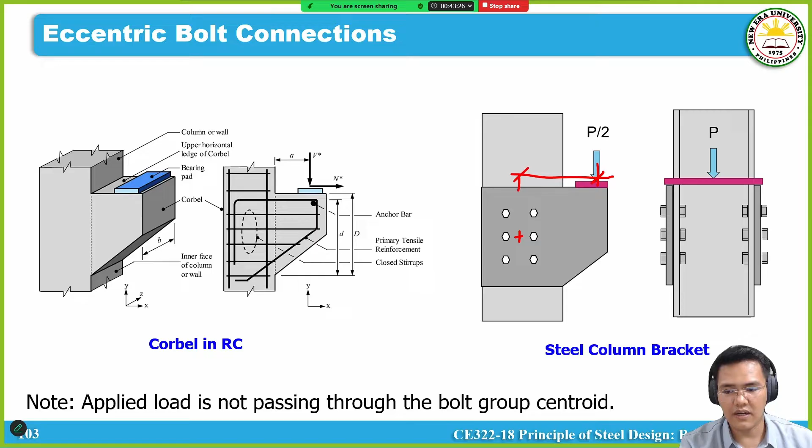And what happens is you now have an eccentricity in that direction. So let me emphasize: in this example, our applied load is not passing through the bolt group centroid, and there's an eccentricity. So what do we do?

Let's give another problem for eccentric bolt connection. So for this figure, we have a column bracket like so, and we apply a load P at a certain angle.

To simplify our calculation, we could resolve this into components. So you can see we have component P sub Y and component P sub X.

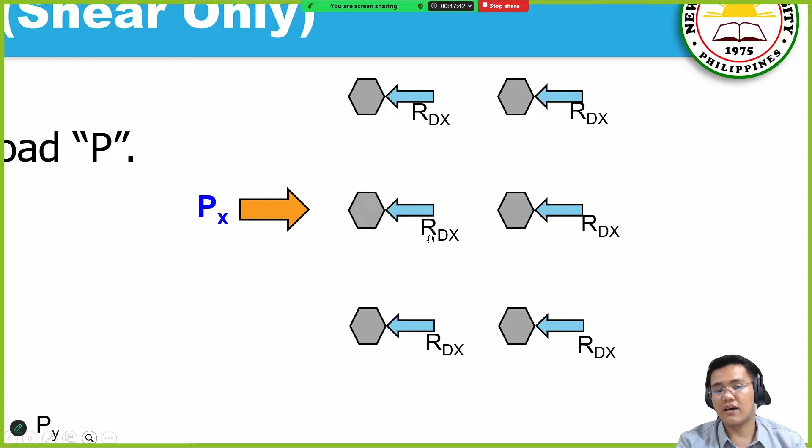Similarly, for P sub y, it's going down, so the reaction is going up, equally shared as R sub dy.

For step 3, we have a derived formula. I want to emphasize R sub tx, which is this equation, and R sub ty, the same set of equation.

The question is, how was that derived? Let's show it. But for the board exam, you should not derive this, you should already memorize it, since we have limited time, so you should be able to memorize these values.

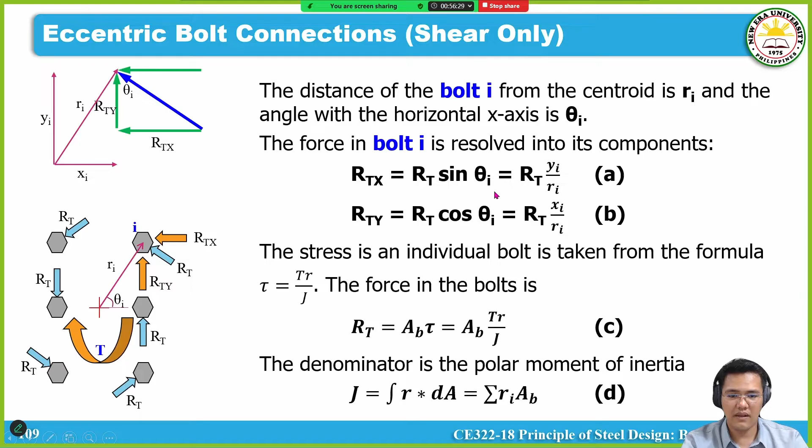Now let's use equation D to substitute in equation C. What are those two? We substitute them into the equation, and we will have R sub T equals A sub B, torque R, and J. Then we simplify it further by substitution.

On this equation, something can cancel out: A sub B cancels with A sub B here. What remains is torque R over the summation of R sub I. That's our equation E.

Now, by common sense, using the Pythagorean theorem, R squared equals X squared plus Y squared, you would have this equation for the summation of R sub I. Let's plug that in, and let's call this equation F.

Now let's substitute everything. From R sub Tx, from the previous slide, let's substitute all of it to see how we arrive there. This is R sub Tx, and this is our equation: R sub T, Y sub I over R sub I. Let's take R sub T first, which we already derived. So for R sub Tx, we still have Y sub I over R sub I. Let's go back to the next slide.

So ito na yun, okay? Simplify. Meron mga cancel out, I think R sub I. Cancel out, materialize ito. Okay, the torque T times the Y distance.

Gusto ko lang i-emphasize, no? If X component yung kinakalculate natin, Y distance, no, yung ating gagamitin over the polar moment of inertia. Okay, similarly for R sub T, Y. Okay, ito equation natin.

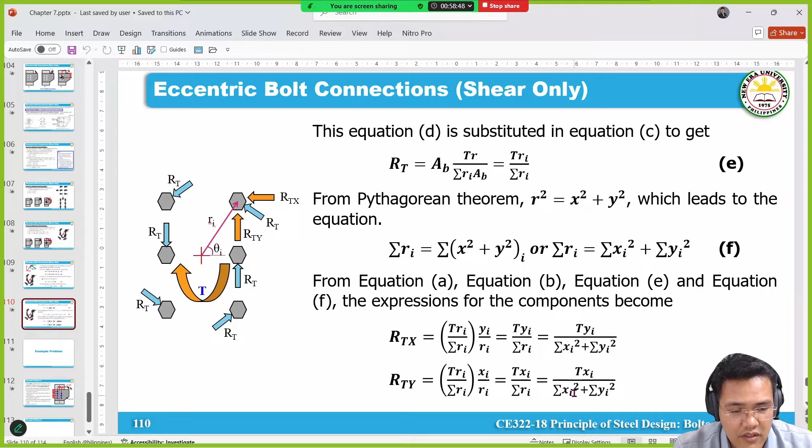Ang mapansin yung multiplier for Y component is yung X distance, X sub I, divided by the summation of X sub I plus Y sub I, or polar moment of inertia. Okay, sige, para mas maganda, mas ma-visualize niyo, let's do the calculations na lang.

Okay, so example problem tayo. Sample problem, number 5.

Using LRFD, determine the adequacy of the connection shown based on the bolt shear capacity. The bolts are 22 mm, A490N. A, locate the bolt group centroid from bolt 1. B, calculate the component reaction due to the direct load P. C, determine the polar moment of inertia of the bolt group. D, determine the component reaction due to the applied torque T.

E, find the reaction of the most stressed bolt. F, what is the design shear strength of one bolt? G, what is the DCR?

Okay, so for example problem number 5, which is eccentric bolted connection, shear only, we could see na ito yung arrangement ng ating mga bolts. Now, masyado kasing madali kung ang arrangement is 4 by 2, so to complicate our calculation, tinanggalan ko ng isang bolt dito. Okay, so hindi rin ganun, hindi rin same yung ating spacing: 80, 100, 75.

Tapos meron tayong 60 doon from point of application ng ating load PU. Tapos ang distance ng ating column of our bolts, no, is 180. Tapos from this column of bolts, meron tayong 200 from the point of application ng load PU. Yung load PU natin is 350 kilonewton inclined at a certain slope, which is a 3-4-5 triangle kumbaga.

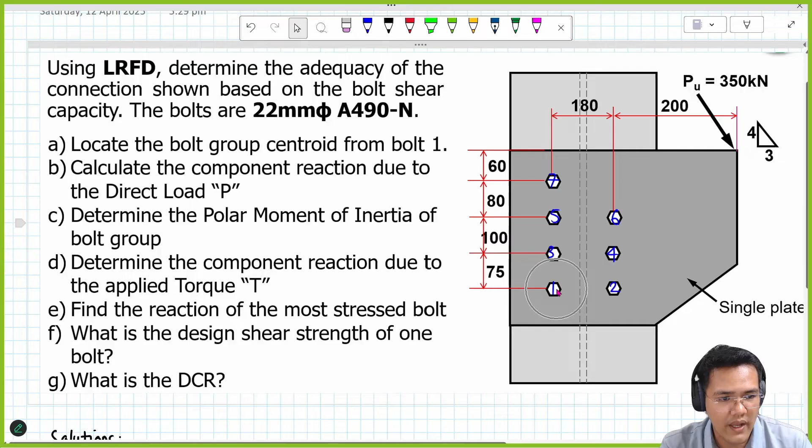Okay, sige so item A, automatic 'yun, no? Yung ating bolt group centroid, lagi 'yun, yung ating bolt centroid of our bolt group. Now dito specific na sinasabi niya, kunin mo daw yung centroid mo from bolt 1. Okay, so ito yung naming natin ng ating bolt 1, 2, 3, 4, 5, 6 and 7. Centroid from bolt 1.

So in terms of centroid, I think alam niyo na, in terms of centroid. Siguro mas maganda, let's simplify pa further yung ating figure to eliminate some, simplify. So let's use itong figure na to, galing sa past calculations. So meron tayong 7 bolts.

And these bolts meron tayong spacing as depicted dito sa figure, okay, so okay na tong spacing na yan. So ang sabi, to calculate the bolt group centroid from bolt 1, ang first step kasi in terms of centroid determination, dapat mag-assume ka ng origin, di ba? So ito yung i-assume natin na 0,0.

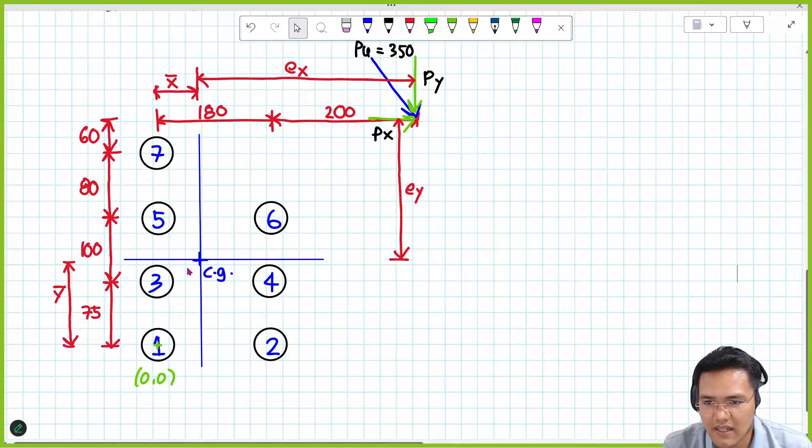Okay, so by common sense, ito common sense lang to. Since nawala yung isang bolt dito and mas marami yung bolt dito sa ating left side, dapat medyo didikit dito yung ating centroid sa 4 na bolt. And dito naman sa to, since 4 yung bolt dito and 3 na lang dun sa taas, dapat medyo didikit din sa bolt group na to yung ating centroid. So check natin yun mamaya.

Okay, so in terms of centroid calculation, mabilis lang naman yon. Ang gagamitin natin, as discussed kanina, would be the Varignon's theorem. Varignon's theorem pa din. Okay, which is, ano nga ulit to?

Ang sabi natin dito, the centroid. X bar - yung definition ng X bar is from the origin to the centroid, CG, that is your X bar. Again, from origin to CG, yung vertical distance naman, that is your centroid Y bar.

For X bar, ang sabi natin is the summation of area, individual area, times the distance X, or the centroid of that individual area, divided by area total. Basically, yan lang yung definition ng ating X bar.

Dito kasi, as you can see, wala naman tayong area, pero we could take advantage yung number of bolts. Kumbaga, isang bolt is equivalent to isang area or equal to 1, for simplification. We would replace yung area by the number of bolts for our calculation.

Hindi mo lang pwedeng gamitin yon kapag magkakaiba yung diameter ng ating bolts. So yung assumption na yon is assuming na lahat ng bolt diameter natin is pare-parehas dito sa ating connection. Pag meron kasing differences in terms of bolt diameter, mas complicated yung calculations, hindi mo na pwedeng gamitin to. Sa board exam wala namang ganun, even on my problems.

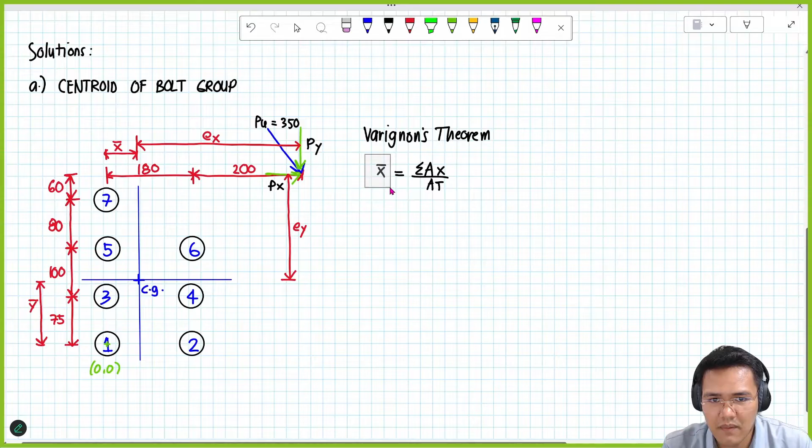So let's use this formula for centroid. Sige, plug in natin yung mga values. For example, from the assumed origin, punta muna tayo sa column of bolts na to. Itong column muna - we have all in all 4 bolts for this column.

For the area, yung sabi natin number of bolts, multiplied by the x distance. Now, from origin, to the centroid of each individual bolt na to, ano ba yung x distance niya from the origin? Common sense yun, that is 0, kasi nga wala namang difference in terms of x distance yung mga bolt na yan.

Plus, summation, itong column of bolts naman na to, yung 2, 4, and 6, so tatlo yan, meaning 3. And then yung distance niya from the assumed origin, so that is 180. Now let's proceed dun sa denominator, so which is the area total, that is synonymous with the total number of bolts.

So sa bolt natin, connection natin, we have 7 bolts. So we would have the value of x bar which is equal to ilan to? 77.14286, 77.14.

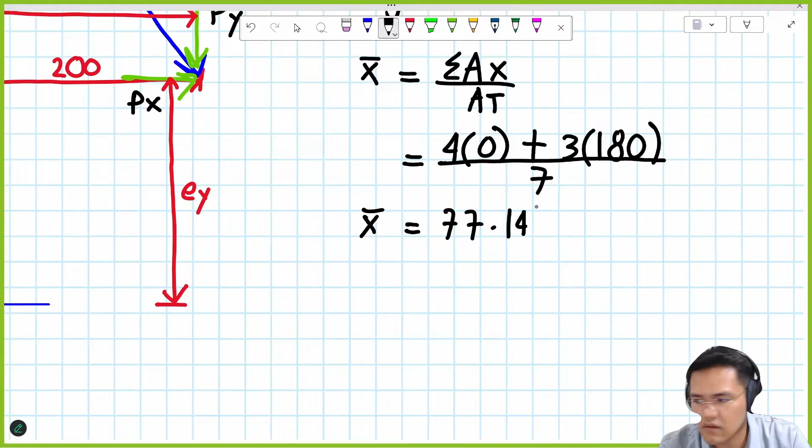Okay, sige, okay na tayo sa x bar. We could now calculate yung y bar. So yung y bar naman, ganun din, Varignon's theorem lang din. So dito, summation of area, yung centroid of that individual area divided by area total. So parang wala na masyadong nagbago.

So plug in natin yung mga values. From the assumed origin, yan yung strategy natin on centroid calculation. Unahin natin yung bolt 1 and 2. Row naman tayo ngayon, row. So for bolt row 1 and 2, ang total number of bolts nun, dalawa. So 2 times ano ba yung y distance nung bolt 1 and 2 from the origin or from the bolt 1. So that is 0.

Plus, yung bolt row 3 and 4, so dalawang bolt yon, so 2 times ano ba yung distance niya. So yung distance niya from the origin is 75.

Similarly, for bolt 5 and 6, ganun din, that's 2 bolts times yung distance niya from 0, that is 75 plus 100. And lastly, yung bolt 7, which is 1 bolt only, and ang distance niya is 75 plus 100 plus 80.

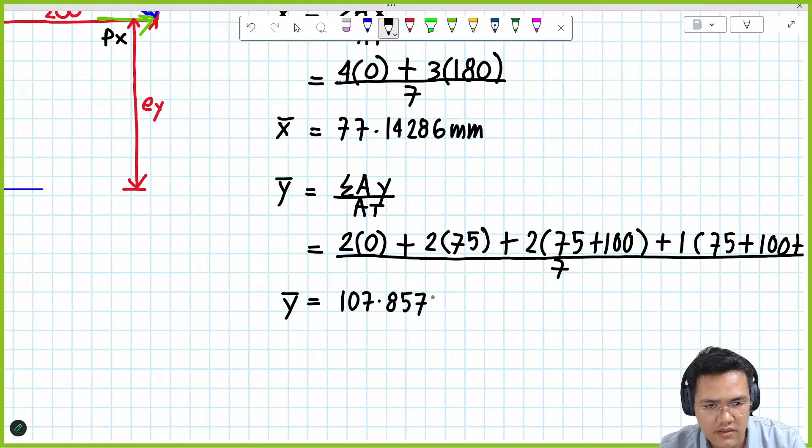So we would have y bar equal to how much? 107.85, 107.85, 714. Okay, so we're done in terms of the centroid.

Let's quickly check if this makes sense. The x bar we calculated, common sense-wise, you could see that half of 180, this distance, is 90. And there's 4 here and 3 in terms of the column, so it should be closer to this column. So 77 makes sense. Similarly for y bar, I think this is also the appropriate value. Now we could proceed to the rest of the item.

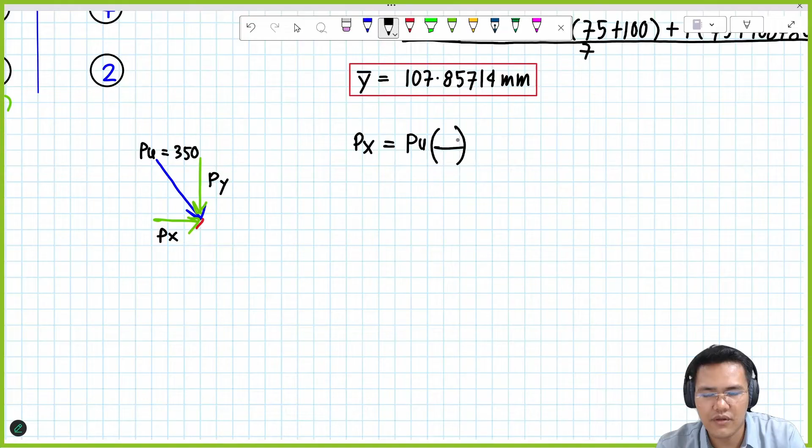Let's just use similar triangles. This would be P sub U multiplied by a certain ratio. By the way, the slope of our applied load is a 3-4-5 triangle. So obviously PU is the hypotenuse, the denominator 5, and since we want P sub X, the numerator should be 3.

By similar triangle, we could also calculate P sub Y using P sub U times, in this scenario, since P sub Y is in this direction, that would be 4. As simple as that.

We could plug in the value of P sub U into our equation. So what values do we get? P sub U is 350. P sub X is 200... 210, okay. How about P sub Y? 280. 280 kilonewtons, okay.

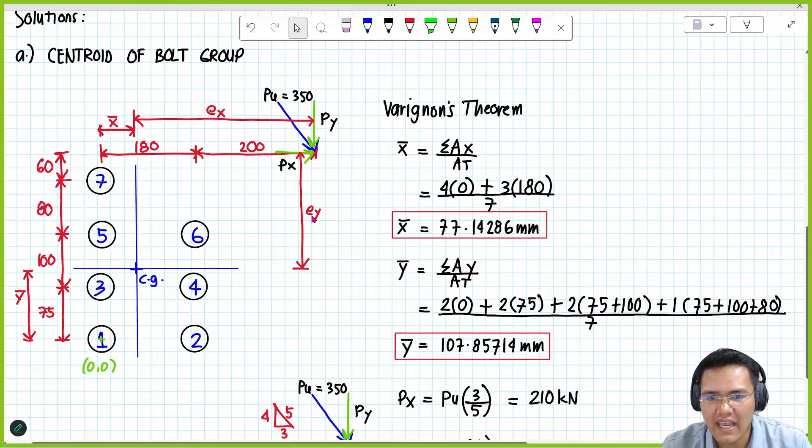Alright, we're done with this resolved component. Let's calculate the remaining parameters we'll use, for example the eccentricity X and eccentricity Y. So what's the definition of these two? Well, from the centroid to the point of application of load PY and PX, there's a moment arm.

The moment arm from centroid to the point of application, this horizontal eccentricity, we'll call E sub X. If we want to calculate E sub X, we have this distance, 180 plus 200, that's the total, and then we subtract x bar to get E sub X.

Let me show it here: E sub X is simply 180 plus 200 minus x bar. So we have the value of E sub x, or eccentricity x. Let's plug in x bar into the equation. How much is this?

322 point... please double check what you're giving me. 322.8571... 332... 322, please. So, okay, how about the other student? 322.85714.

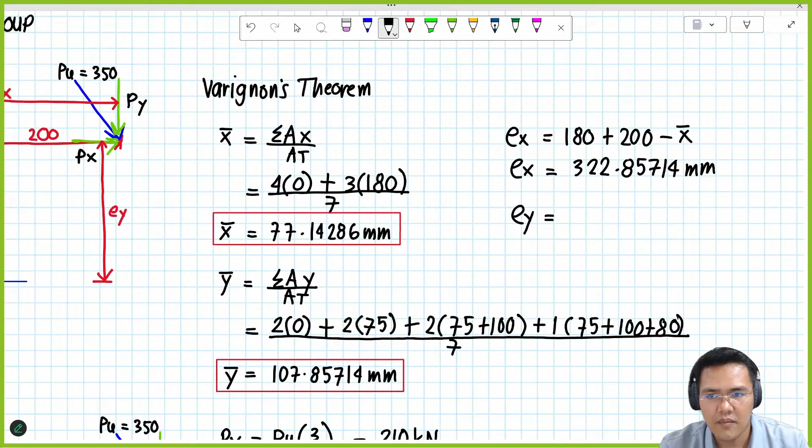Okay, I'm assuming it's the same from the other student. Now E sub Y. For E sub Y, from the CG to the point of load application, this is the vertical eccentricity. How do we get it? If you refer to the figure, E sub Y is simply 60 plus 80 plus 100 plus 75, then we subtract Y bar, and what's left is E sub Y.

So again: 60 plus 80 plus 100, plus 75, minus Y bar, okay. Please double-check this E sub X again, because I think this isn't the right number.

From 302. Sir, 302. Yes, but the rest is the same. Correct? Yes. Okay, how about this one?

This is E sub Y: 207.14286. Okay, alright.

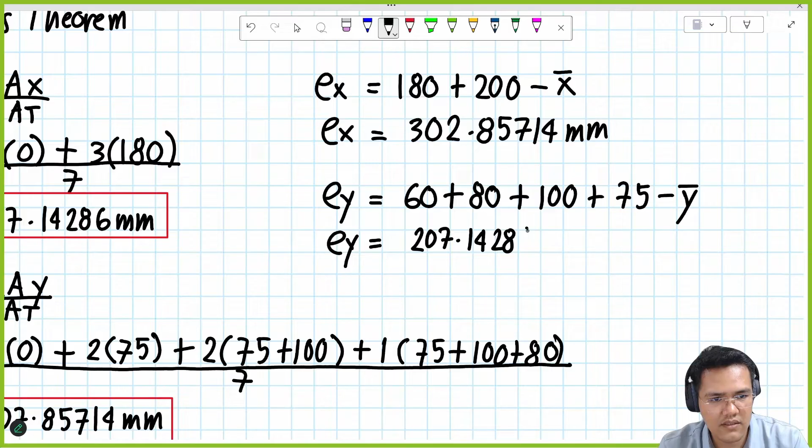So okay, we're complete in terms of the parameters we need. We could now proceed to the next item: calculate the component reaction, or the reaction due to the direct load P, for item B.

For the direct load P, ang sabi natin kanina, 'di ba? Copy natin tong figure natin na to. Let's use this to simplify our calculations, no.

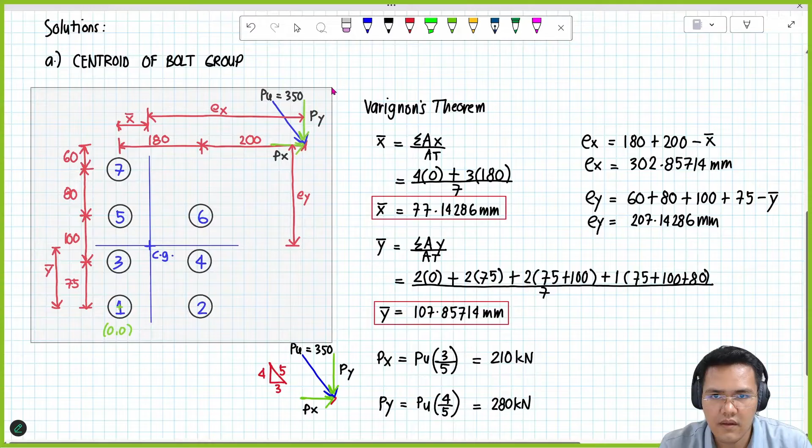Ang sabi natin kanina, for direct load P, ang gagawin lang natin diyan, ililipat natin yung ating mga forces, yung resolved component nun, dun sa centroid ng ating bolt group, okay? So halimbawa, yung P sub y natin is downward, yung P sub x natin is going to the right, okay? Ibig sabihin, if nililipat natin siya dito, we could say na ito yung P sub y. Then ito naman yung P sub x. Yun na yung direct load P.

Ang discussion natin dito for the direct load P, basically ano lang 'yan, no? Ang sabi natin dito parang third rule ni Newton. Sabi natin for every action merong equal but opposite reaction. So ibig sabihin for P sub x na lang going to the right tayo.

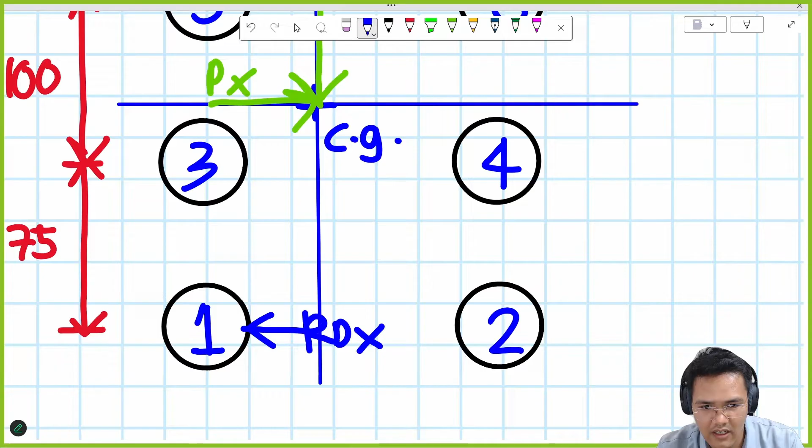Kung i-check natin yung bolt number 1, yung bolt number 1 should have an opposite direction ng mga reaction na yon. So going to the left tayo, going to the right tayo. Ibig sabihin going to the left yung ating R sub dx, na component. Similar with P sub y which is going down.

Ibig sabihin going up yung ating reaction sa ating bolt, and this is due to direct load. Kaya gumagamit tayo ng subscript na d, R sub dy.

Meaning y component. Now, obviously, for direct load P, hindi mo na kailangang i-calculate lahat kasi pare-parehas lang naman yan sa lahat ng bolt, kasi nagpa-pass through na sa bolt group centroid. So ayun na, i-copy mo na lang siya, kasi pare-parehas naman na lahat yan. Sa lahat ng bolt, dun sa connection natin, yung due to direct load is no?

Parang we need to... okay, ilipat ko lang to guys, para mas mabasa ng maayos.

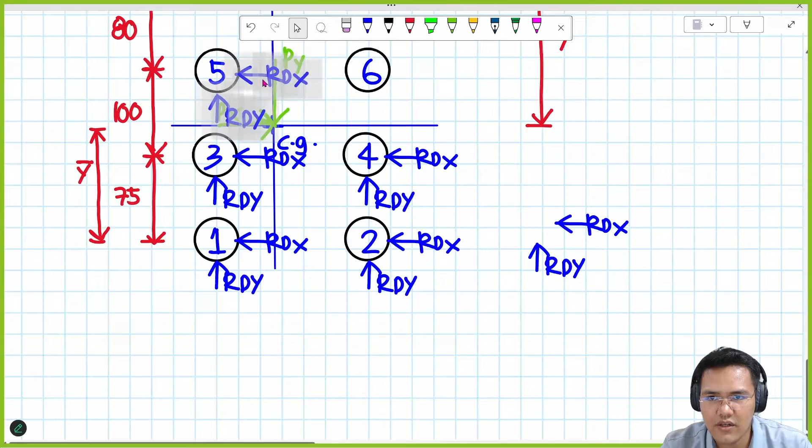Okay, similar na lang siya on for the rest of the bolts. Okay, and yung formula natin dito, as per discussion kanina on the derivation of formulas, na supposedly memorized yun. Pag nasa board exam kayo, hindi na kayo mag-derive pa ng formula.

Ang formula natin for the R sub dx muna, for R sub dx na component, ang sabi natin diyan that is simply yung load P sub x divided by the total number of bolt. Equally shared lang sila.

So therefore, we could say na yung P sub x natin as per calculation sa taas, that is 210. P sub y is 280. So plug in lang natin dito, we would have P sub x is 210, divided by the total number of bolts. So we would have R sub dx. Ilan to? 30, 30 kilonewton. Simple as that. So 30 kilonewton.

And yung R sub dy is as simple as yung load P sub y divided by n. So that is 280 divided by 7. So R sub dy now is equal to ilan to? 40, 40 kilonewton. So meron na tayong reaction due to direct load P, which is yung pinakamadali.

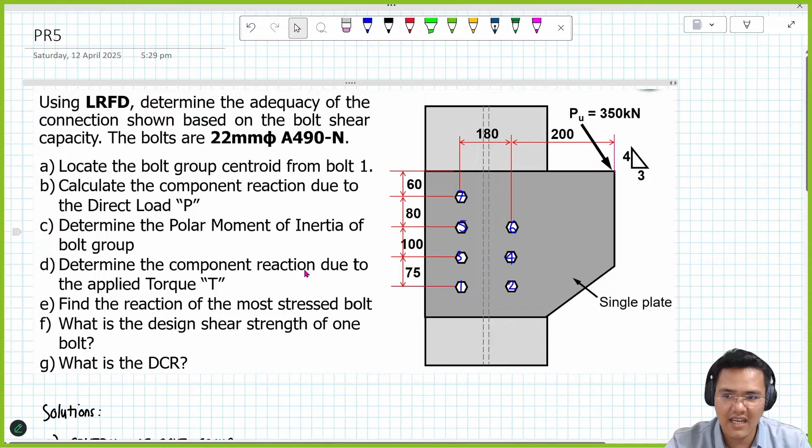Punta tayo sa next item. Sa next item is to determine the polar moment of inertia of the bolt group. So actually, preparation lang tong item C for item D, which is to calculate yung reaction due to applied torque. Kasi gagamitin natin itong parameter na to, yung polar moment of inertia. So sige, calculate natin yung polar moment of inertia ng bolt group.

Ang question is, paano ba siya kinakalculate? Well, pinakita na natin kanina, polar moment of inertia, kung paano siya i-derive, and may formula na nga tayo. So gagamitin na lang natin yon. Sige, let me copy natin to.

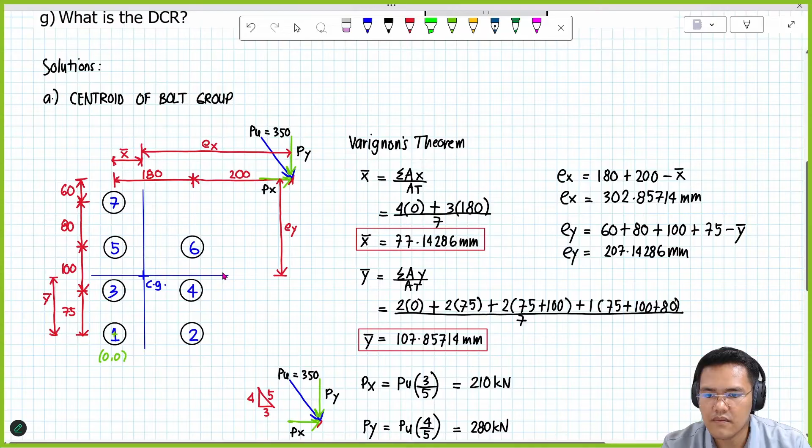Dun sa derivation natin, i-reply ko lang yung PowerPoint kanina. Dun sa derivation natin, ang sabi natin, dun sa mga formulas na na-derive natin, yung J, which is the polar moment of inertia, is also synonymous with this one, no? Yung summation of x squared plus summation of y squared. Actually, yun na yun, yun na yung formula natin. So we could say na yung J, or the polar moment of inertia, is equal to summation of x squared plus y squared.

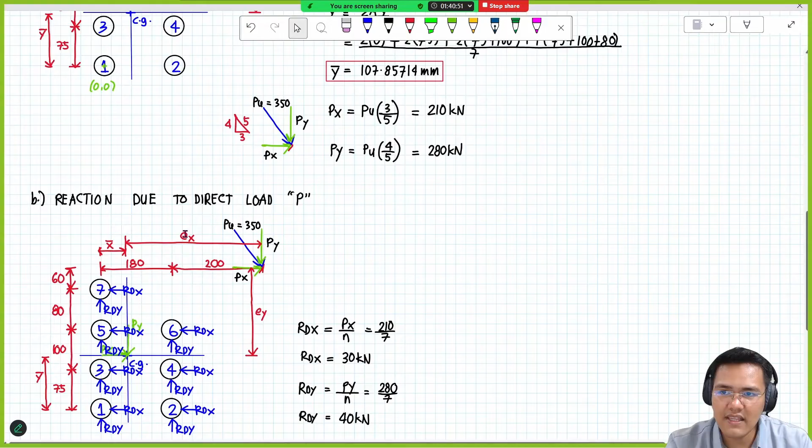So ngayon ang question is, ano ba ibig sabihin ng mga distances na yan? Well, just to emphasize, yung mga distances na to, kung sa centroid, ang measurement natin is from the assumed origin. Pagdating dito sa polar moment of inertia, ang measurement natin from CG na.

Okay, from CG na. So halimbawa, mag-focus muna tayo kay x distance. By the way, kung ito yung CG mo, kahit na mag-assume ka dyan ng negative or positive, irregardless kung ano yung value, mapapansin mo naka-squared to, meaning absolute value, kahit absolute value na lang.

Kasi positive pa rin naman yung lalabas. Okay, sige, unahin muna natin yung x squared. Sa x squared, from CG, itong column ng bolts na to ay pare-parehas yung distance niya from CG, which is the distance x bar. Yun lang pala yun, yun lang distance na yun. So therefore, yung ating x squared is simply yung x bar, yung distance ng apat na bolt na to, yung 1, 3, 5, 7, and yung ating x bar is ito. Copy natin to.

At ang sabi is squared daw natin. Squared. At don't forget to include kung ilang bolts ba 'yon. Ilang bolts ba 'yon? We have 4 bolts. So times 4.

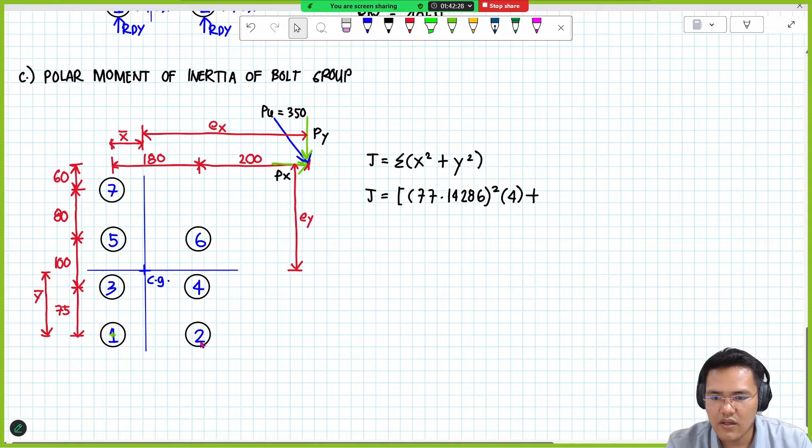Plus, yung bolt naman sa right side. So from CG, ano ba yung distance ng bolt 2, 4, and 6? Actually, wala pa tayo nakaka-calculate, pero we could take advantage nung 180 minus x bar, kasi yun din yung distance na 'yon, distance ng CG to our bolt 2, 4, 6. So plug in natin dito, that is 180 minus x bar, at yung x bar natin is ito.

Then multiply natin by the total number of bolts, so tatlo yon, times 3. Okay na tayo ngayon dun sa x squared, na-count na natin lahat ng bolts, distance ng mga bolts at x direction, from CG.

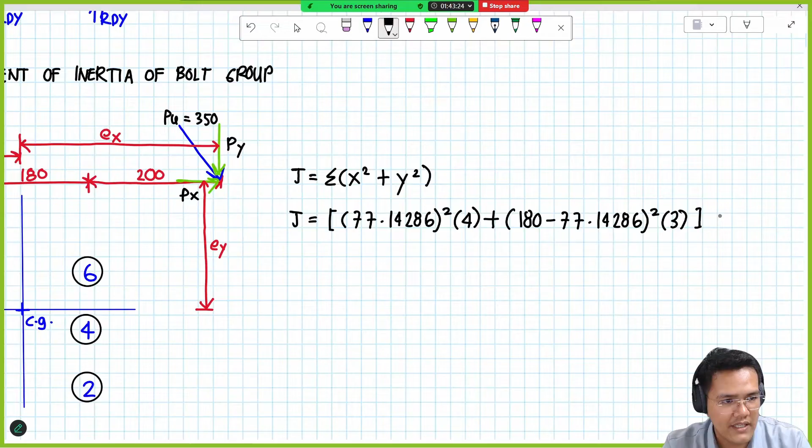Punta tayo ngayon sa y squared. For y squared, ito ngayon yung calculations natin. Unahin muna natin yung bolt 1 and 2. Yung distance niya from CG is simply y bar, as simple as that. So kunin natin ngayon yung value ng y bar, ito yun.

Bolt 1 and 2, ito yung y bar, yung y distance natin doon. Don't forget to multiply by 2 kasi dalawang bolts yun.

Sunod tayo sa bolt 3 and 4. Para sa bolt 3 and 4, y distance, from CG, ano ba yung y distance natin? Dalawang bolts na yan, so that is simply y bar minus 75, kasi 75 to. So yung matitira, yung distance na yan, from CG to bolt 3 and 4, kunin natin yon, yung y distance, ito yun.

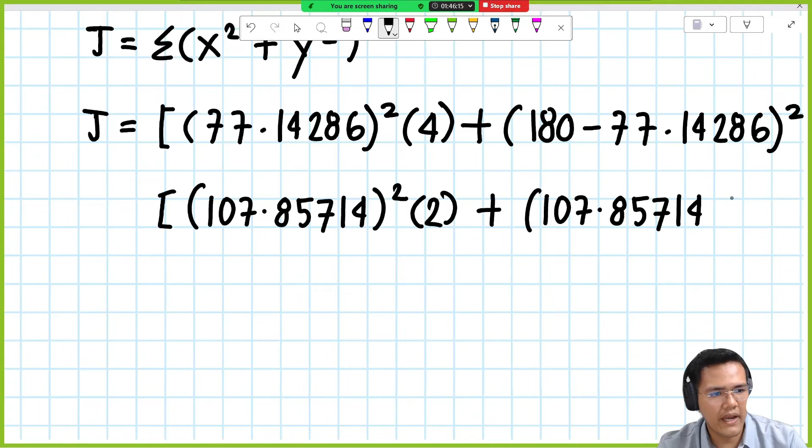Minus 75, squared, and multiply it by the total number of bolts. Okay na tayo for bolt 3 and 4.

Let's proceed sa 5 and 6. Paano ba yung distance natin from CG? Well, basically, we could take advantage, 100 plus 75, minus y bar. So ang matitira doon is from this point to this point. 100 plus 75, minus y bar, ito yung y bar natin. Times 2 rin yun, so copy na lang natin to, times 2 for 5 and 6.

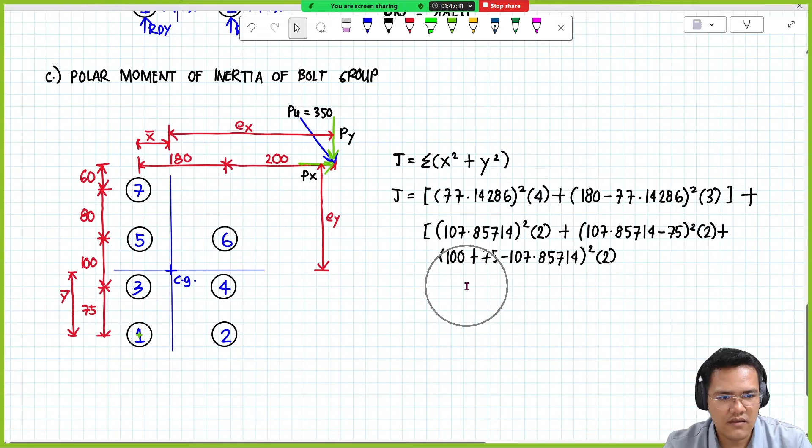Para sa bolt 7, ganun pa din, 80 plus 100 plus 75 minus y bar, yung distance niya from CG. Basically, parang ito na rin yun, so i-copy na lang natin to, dagdag na lang natin, plus 80. Ang multiplier natin dito is 1 na lang, kasi single bolt na lang tayo for bolt 7.

Sige, so that would be the complete calculation for J. So ilan to? Paki-calculate nga.

Polar moment of inertia J is equal to 56,090 point... paki-double check kasi magkaiba kayo ng value.

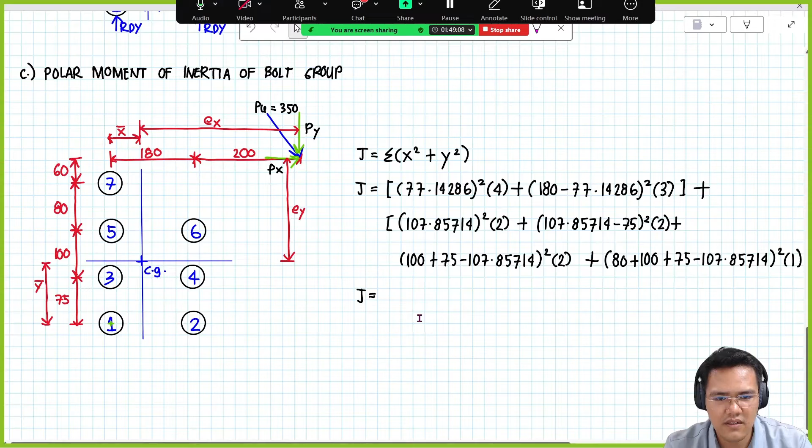Ang naalala ko, this is 111 something thousand. Paki-ano nga, sorry. So ilan to? 111,635.7143. Okay, so yung unit natin dito, as per given, is x squared plus y squared, meaning millimeter squared lang. Sige, let's proceed dun sa next item.

Determine the component reaction due to applied torque T.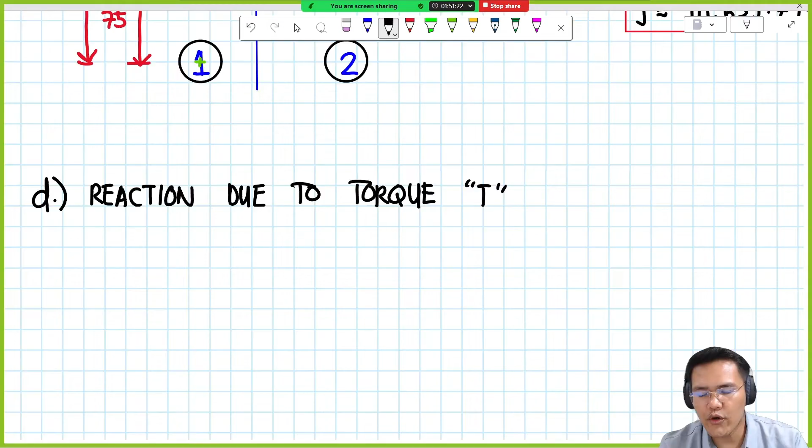Okay, for torque T, yung first step natin lagi is to define ano ba yung direction ng ating torque T. Equivalent torque T na i-apply natin sa bolt group centroid, di ba? Ang sabi natin kanina, aside from the direct load, meron pa kasing reaction due to torque. So yung first step, i-define mo muna ano ba yung direction ng equivalent torque dito, counterclockwise ba, or clockwise?

So to do that, we could simplify by taking summation moment at CG. So by taking summation moment at CG, ano ba yung mga loadings natin? Ito lang 'yon.

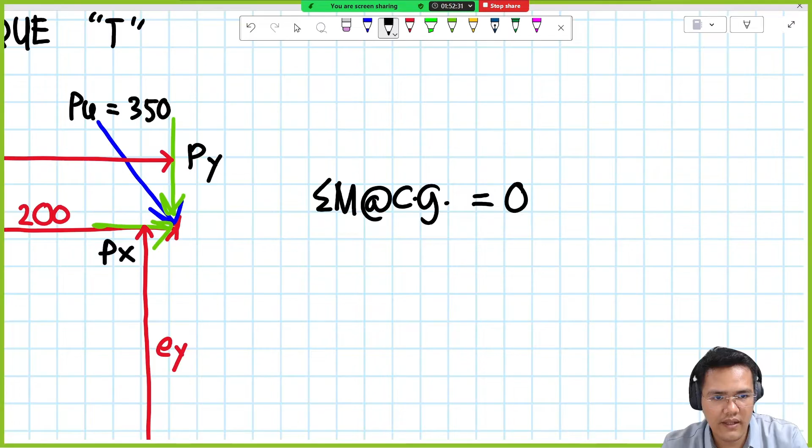P sub X and P sub Y. So, take moment at CG or centroid. Summation of moment at CG equals 0, and our assumption is clockwise is positive. So we have torque T at centroid equals, where all forces that are clockwise is positive.

For example, let's take P sub X first. P sub X from CG will have a moment or torque. So our P sub X force has a moment arm, which is simply the vertical eccentricity E sub Y. That is the moment arm of P sub X from CG.

Now, the value is positive because the rotation of P sub X is clockwise, from summation of moment at CG, so it's positive. Similarly, P sub Y's rotation is also clockwise, so that means it's positive too. So plus P sub Y times its moment arm, which is E sub X.

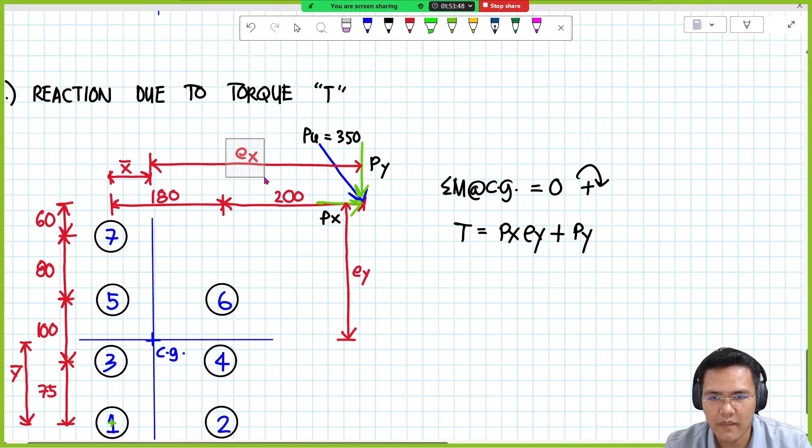Now from this, we can plug in the values. So our value would be P sub X, which we have already calculated. Where is it? We have 210, 280 for P sub Y, and these are the eccentricity values. Let's copy this and plug it in here.

So for P sub X, that is 210, E sub Y is this, and P sub Y is 280, multiplied by E sub X. So there it is, now we have the value of our torque T.

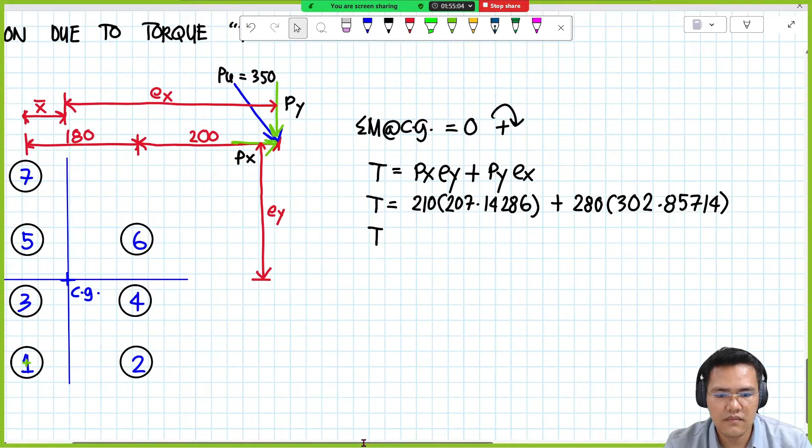So we have the torque T. So how much is it? 1, 2, 8, 299. 299 point... point 9998. Okay, so.

So our unit is kilonewton millimeter, just to be clear, so that when we do the unit check later, we would achieve the unit we want.

Okay, so we already have the torque T. And it's clear here, since the answer is positive, the direction of our torque is clockwise. Now, this is just a technique.

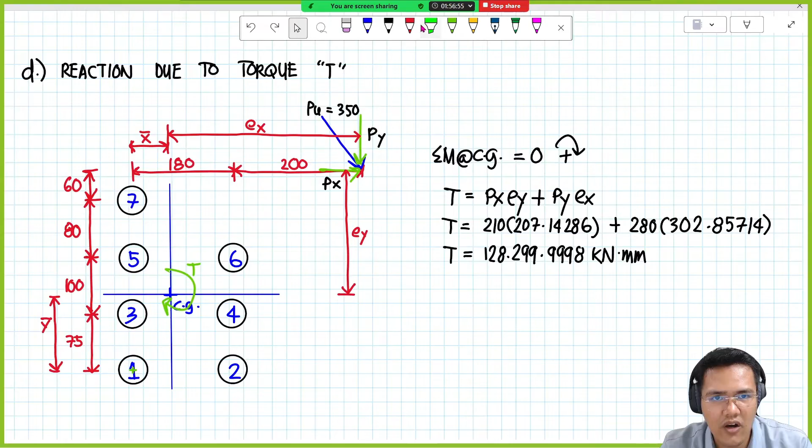Now, we already proved that our action is clockwise. So therefore, the reaction should be equal and opposite, meaning the rotation should be counterclockwise. Now, the strategy if you're drawing the reaction due to torque T is to first draw a straight line from CG to the individual center line of each bolt.

For example, this is for bolt 1. This will take time, but this is just for demonstration purposes. In an actual problem, once you know the basis, you don't need to do this anymore.

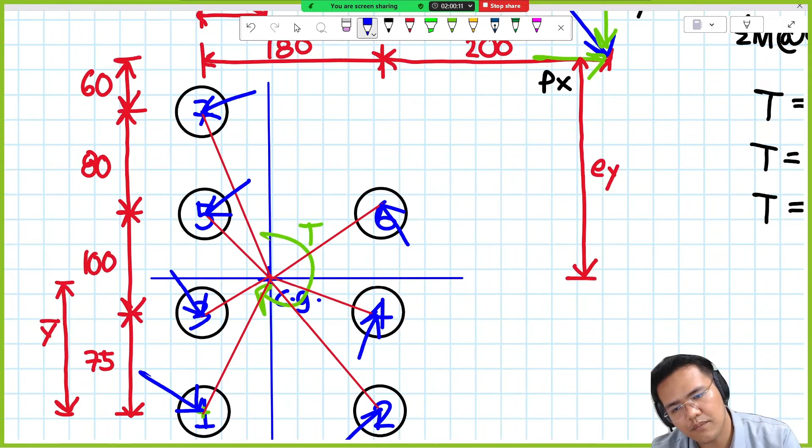So that's your assumption for the direction of reaction T, or R sub T, reaction due to torque. Now the next step is to resolve this into components so you can visualize it better. For example, this one has a component like this - the reaction at bolt 2 would be upward to the right.

Okay, so complete na yung ating mga reaction due to torque at different bolts. Now, let's proceed dun sa generic na formula ng mga na-derive natin kanina, based on our derivation.

Sa pinaka-summary, ang sabi natin, pagdating sa reaction due to torque T, the formula is simple: R sub Tx is equal to the torque T times yung y distance. Let me emphasize, kapag x component ng torque, ang multiplier natin sa numerator is yung y distance, tapos yung polar moment of inertia. Yung r sub Ty naman, since y component, yung multiplier natin is x distance.

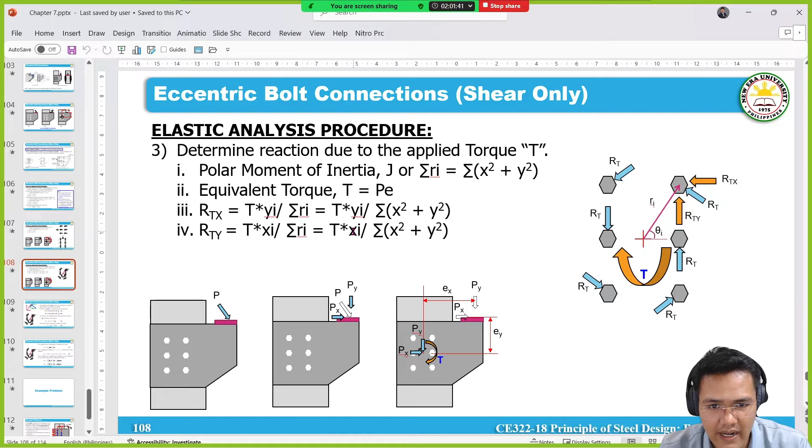Okay, so copy natin yung ating pinaka-general formula for reaction due to torque. Let me repeat, hindi ka na magdi-derive, dapat memorize mo na to. R sub Tx is equal to the torque T, times, since x component yung y distance, divided by the polar moment of inertia: x squared plus y squared.

Similarly, yung para sa y component ng reaction, parehas na parehas lang, we just need to change. So this would be r sub Ty, multiplier natin, this would be the x distance nung bolt in consideration.

So isa-isahin natin, the question is para hindi tayo tumagal, let's proceed on the calculation ng mga bolts na alam nating magogovern. Sa ganito kasing problem, ang interesado lang tayo sa tinatawag na most stressed bolt, yung bolt na kung saan pinakamalaki yung reaction na binubuhat. Siguro mag-guess kayo, yung iba sa inyo ang guess is yung bolt 7, yung iba is yung bolt 6, yung iba yung bolt 2 or bolt 1. So for the sake of demonstration, let's check yung apat na bolt na yon.

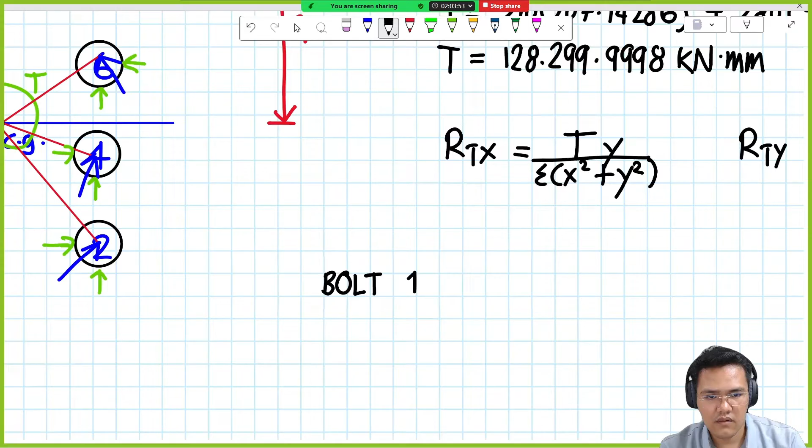Sige, let's start with bolt 1. Ang gagawin mo lang, copy mo yung mga ito. So ibig sabihin for bolt 1, we have the R sub T, and let's be clear na this is for bolt 1, R sub T1. Yung R sub T1 na yan, mayroon niya mga component.

This is R sub T1Y, and this is R sub T1X, yung x component niya. And then we could now plug in yung equation na to.

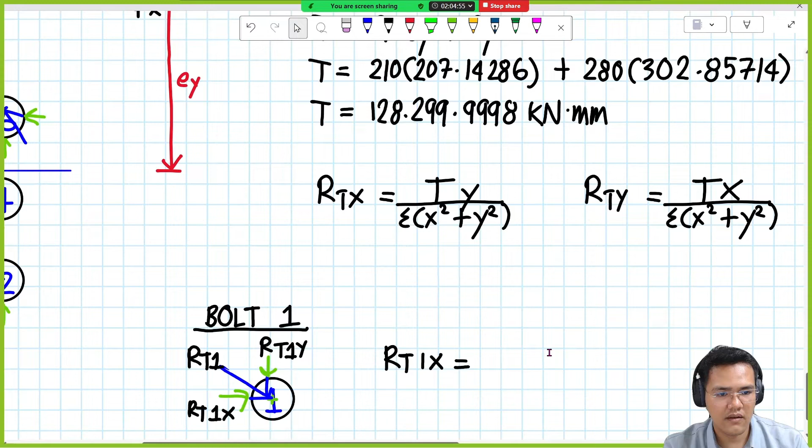So for example, yung R sub T1X is as simple as yung torque T, which is ito, nakalculate na natin. Times yung y distance, so skip muna natin yan, mag-proceed mo sa denominator, yung polar moment of inertia, nakalculate na rin natin kanina, which is ito yon, yung J. So, plug in natin sa denominator. And then we have yung y distance.

Ng bolt 1, from CG. Balikan lang natin ulit, ito yung bolt 1. Ano ba yung distance niya from CG? Well, basically, that's y bar, as simple as that. So kunin natin yung y bar, y bar is this one. So we would have multiplied by y bar, divided by the polar moment of inertia, J.

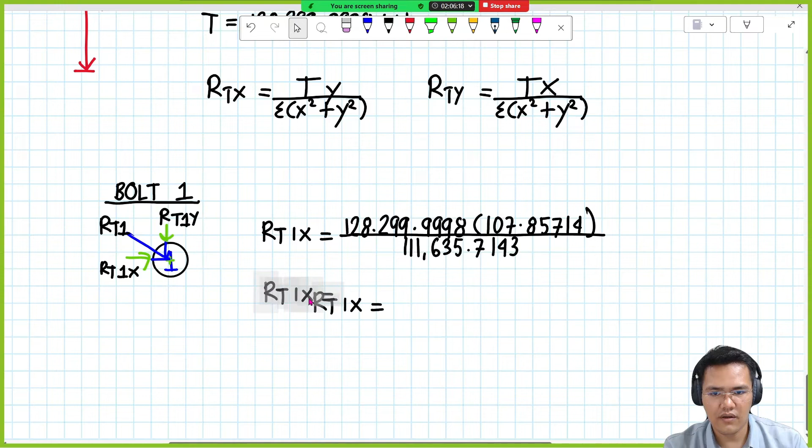So therefore, meron tayong value for R sub T1X. Ilan to? 124.6... paki-double check nga ulit. Ilan to? 123.95516. Okay, I'm guessing na yung iba, ganito rin nakakuha.

Confirm na lang. 95738 sa akin. Anyone with the same 95738? Opo sir, 95738. Okay, so dalawa yung ano doon, so yun yung kukunin natin.

738. Okay, yung unit, wala pa tayong unit, so let's have a unit check. Yung 128, which is the torque, ang unit natin is kilonewton millimeter. Yung y distance, obviously, that is in millimeter. Divided by yung polar moment of inertia, alam nyo na yan, that is millimeter squared. So all in all, kung i-summarize natin, by doing a unit check, this would cancel out, and yung matitirang unit is kilonewton. As simple as that, meron na tayong reaction. Hindi na natin ulitin yan, okay na to. Wala tayong multiplier na 1,000 direct, so we would have 123.95738 kilonewton.

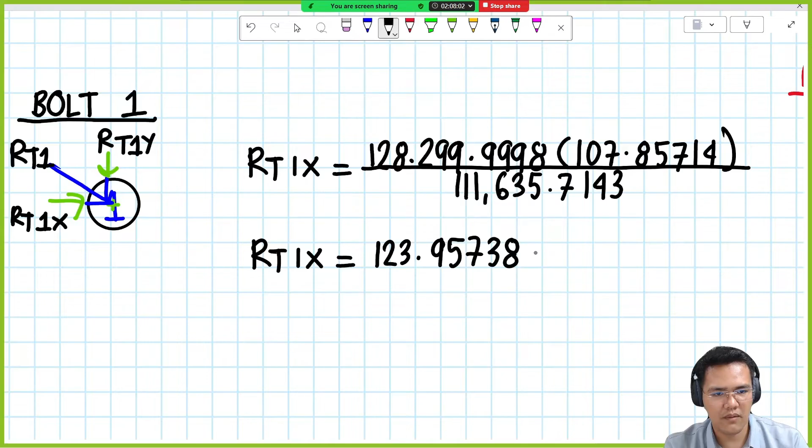Now, going back on the y component, ganun din, copy natin to, kasi parehas lang naman. Yung magbabago lang dito, yung distance.

Okay, so this is the distance. Let's delete this and investigate what is appropriate. For bolt number 1, since this is the y component, we need the x distance. For bolt number 1, the x distance from CG is x bar. Let's get the value of x bar. So this is it.

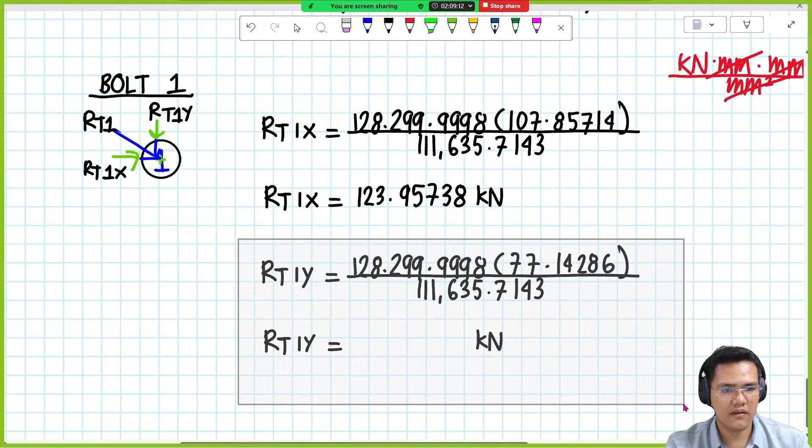Let's plug it in on our equation. We would have... equals to how much? 88.65827. Okay, 88.65827. Okay, we're done for bolt number 1.

Let's proceed to bolt number 2. Maybe let's just copy this so it's faster. Yeah, let's copy that. Let's move it here.

Okay, for bolt number 2, let's get our free body diagram for the bolt, for the reaction. So this is it. For bolt number 2, we have this R sub T or R sub T2. We have the R sub T2Y and R sub T2X components.

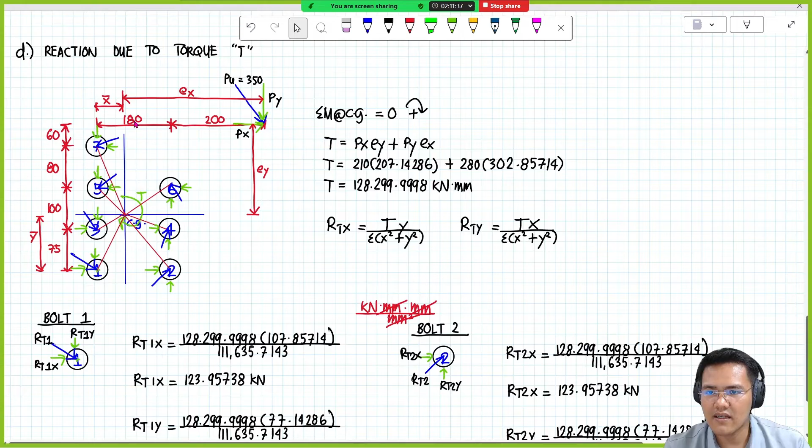And in this case, that is simply the distance from this point to this point, which is 180 minus x bar. So this is x bar. So what do we do now? We just deduct 180 minus x bar.

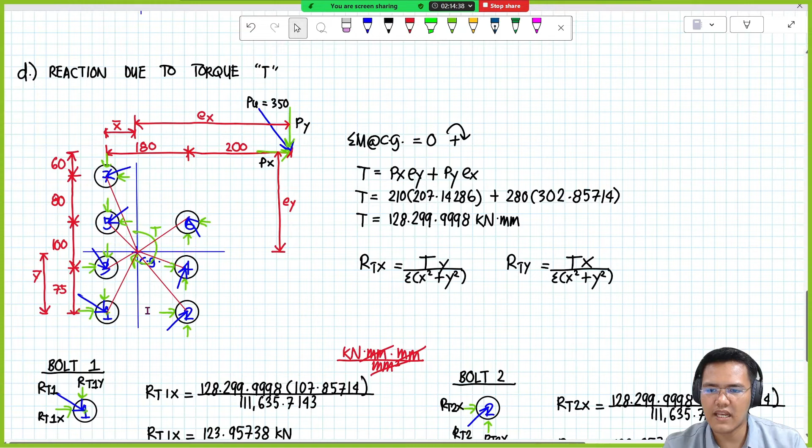This is it. What we need to change is the x distance. So what is the x distance of bolt 6? Sorry, x component, y distance. The y distance of bolt 6 from CG is this, from this point to this point, and that is 100 plus 75 minus y bar. Let's plug that in.

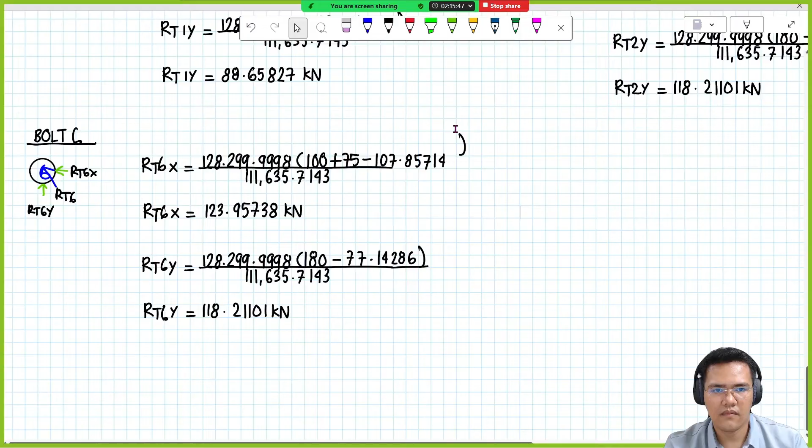100 plus 75 minus y bar. Our y bar value is this. So how much is this? 77.16553. Okay, for bolt 6, that is 77.16553.

Okay, and lastly, bolt 7, let's copy from bolt 1 since they have similarity. Okay, bolt 7. For bolt 7, let's have a look at the free body diagram. So this is it.

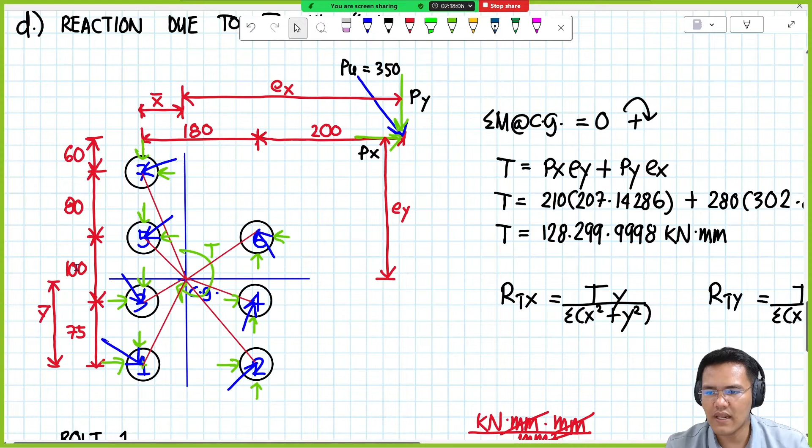So the y distance. What is the y distance of bolt 7 from CG? The distance from CG is simply 80 plus 100 plus 75 minus y bar. This is almost the same as before, we just add 80.

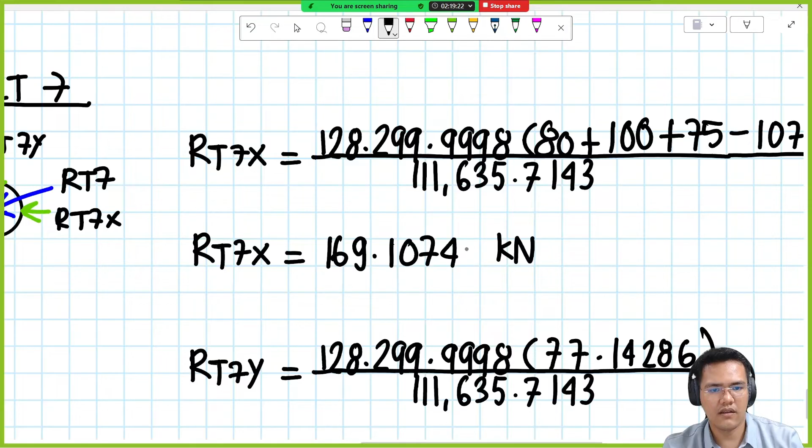Okay, 80 plus 100 plus 75 minus X, Y bar. Meron tayong equation for R sub t, 7x which is equal to 169.10743. Okay na tayo. We already calculated yung mga component na mga bolts na interesado tayo.

We could now proceed dun sa next item, which is the total reaction of the most stressed bolt. Ngayon, wala pa tayong idea kung sino yung most stress bolt. Kaya hinimay-himay natin, pwedeng maging 3, pwedeng maging 4, pwedeng maging 5. Let's formulate a conclusion after this calculation.

Okay, item E tayo. For item E, yung total reaction. Well, for total reaction, ang gagawin lang natin, gagamit tayo ng method of superposition. Na-calculate na natin yung reaction due to direct load P, tapos na-calculate na natin yung reaction due to torque. So ang gagawin natin ngayon, i-himay lang natin, i-compare lang natin siya.

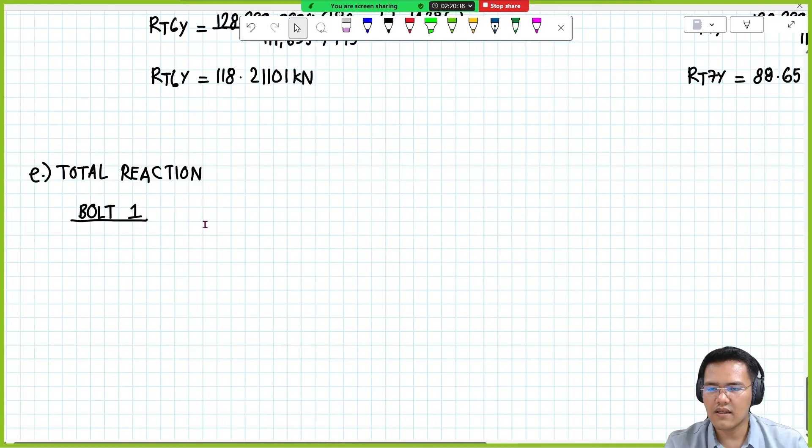As per method of superposition, kunin natin yung effect ng direct load P, i-add natin yung effect ng torque, you would have the final reaction. So for direct load P, kahit saang bolt ka tumingin diyan, pare-parehas lang. Ito na yung reaction natin due to direct load P. Kahit tanggalan na natin to ng bolt number, pare-parehas lang naman yan.

Now pagdating sa torque, ito yung babantayan mo ngayon. Halimbawa for bolt 1, ito yung ating orientation, ito yung free-body diagram natin. Meron na tayong mga direction, mag-assume tayo ng positive value. Halimbawa, any reaction going to the right, positive, going up, positive. So yung formula ng resultant, R is equal to square root of Rx squared plus R sub Y squared. Yun yung ating formula, as simple as that.

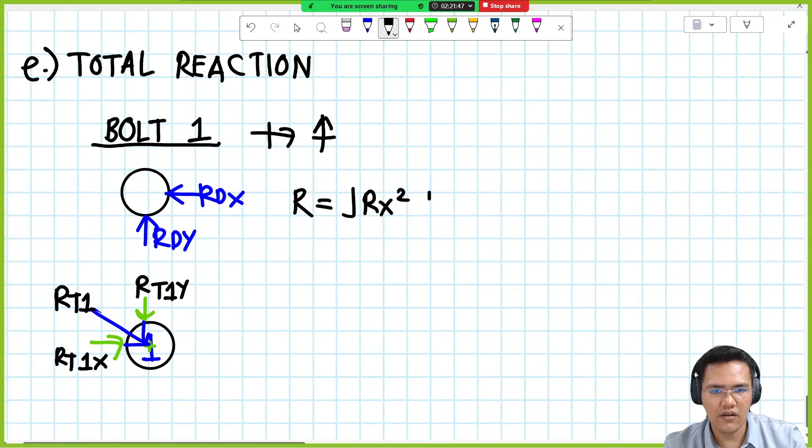Plugging in, halimbawa for R sub X, yung R sub dx going to the left, ibig sabihin negative. How about yung X component ng torque? R sub T1X is going to the right, meaning positive, squared. Plus yung y component, yung R sub dy upward, meaning positive. Yung sa torque naman, pababa, ibig sabihin negative, so negative R sub T1y, squared.

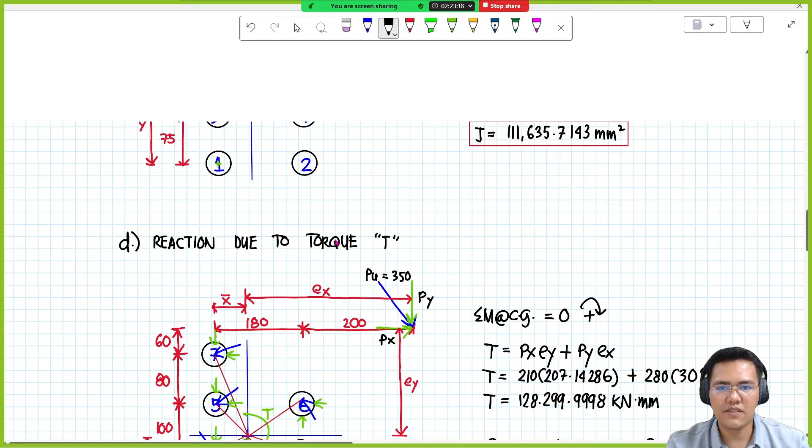Sige, plug in natin yung mga values natin. So we would have the reaction R is equal to. Unahin natin yung R sub dx and R sub dy. As per calculation, yung value ng dalawa is 30 and 40 kilonewton. So this one is negative 30.

Plus yung value ng R sub T1x as per calculation dun sa torque. Ipakita natin, copy natin na lang to, ito rin naman yung gagamitin natin, R sub T1x, ito yon. Plugging in and then squared. Plus, yung value ng ating R sub dy, alam na natin yon, that is 40, positive value, minus yung R sub T1y, ito yon, squared.

Sige, ilan to? Teka lang, ipakita na natin, this is reaction, total reaction at bolt 1, for demonstration purposes. So meron tayong reaction at bolt 1, yung combined na to, total reaction na nga eh. So ilan to? 105.80934, 105, I think for this one we could make it na lang 2 decimal na lang. So ilan to? 0.81, okay 81. Okay na tayo for bolt number 1.

For bolt number 2 naman, no changes on direct load. Kunin natin yung sa torque, which is ito. So we would have R sub 2. Yung ating R sub x component is going to the right, meaning positive. Yung ating y component naman is upward, so meaning positive. So in this case, positive na to ngayon, palitan natin to.

Okay, plug in na natin yung mga values. Halimbawa itong si R sub T2x, ano ba yung mga values natin dito? Okay, itong dalawa na to.

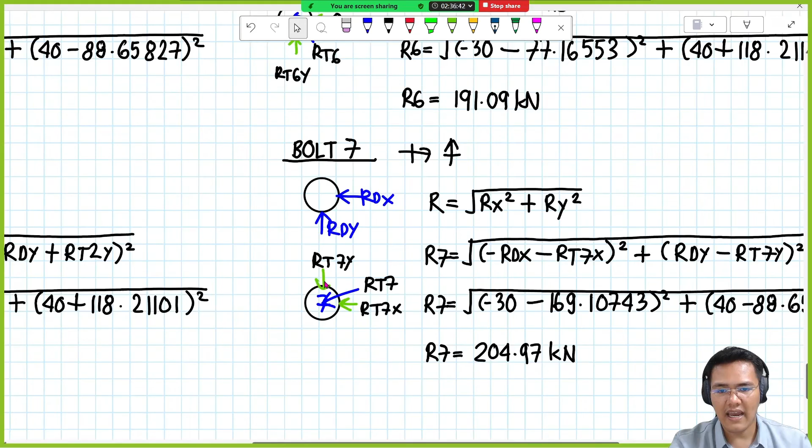Nevertheless, kahit na against yung isa doon, lumalabas sa calculation natin, governing pa rin siya. Kasi ang rule na nag-govern talaga dito yung bolt, rule number 1, kung sino yung pinakamalayo sa centroid mo would have possibly the highest reaction from torque. And rule 2 applicable pa rin sa bolt 7, may isa lang siyang nag-against, itong y component ng torque. So next time pag mag-solve na kayo ng problem, ito lang yung i-check niyo, by experience, yung mga bolt lang na ito yung dapat i-check.

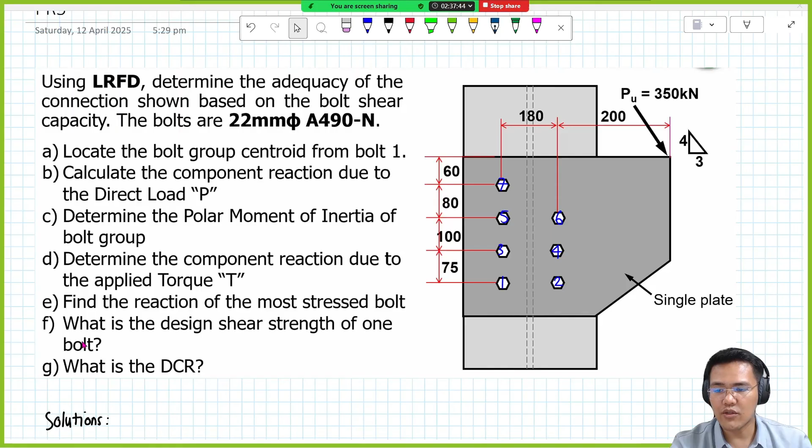Sige, let's proceed sa last 2 item na pinapahanap sa atin. Yung item A to item E, yan yung based sa calculation ng actual reaction sa mga bolts due to applied loads. Itong F, ito na ngayon yung design shear strength ng isang bolt.

Mabilis lang yan. Kasi yung shear strength ng isang bolt, formula based na lang yon. Sige, paano ba yon? Shear strength ng isang bolt, no?

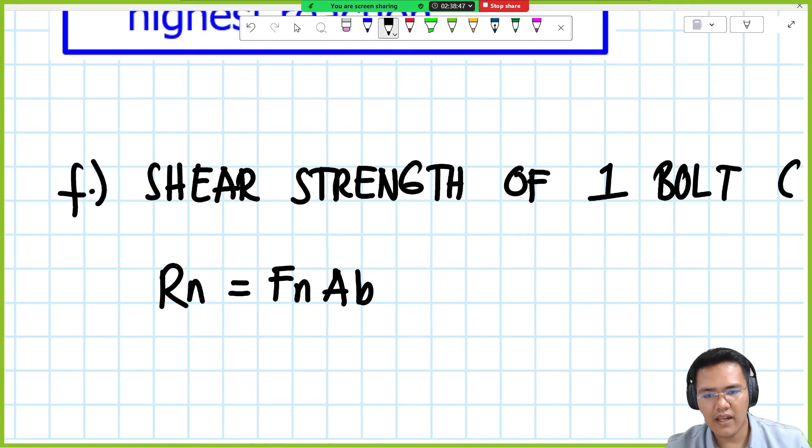Ang pinapagamit sa atin dito, A490 included, FYI. So ang gagamitin natin na formula is as simple as R sub n, nominal capacity, is equal to F sub n times yung area ng bolt. Para makalkula yung F sub n, since shear tayo, balikan natin yung table na pagkukunan ng nominal shear stress. Hanapin natin yung A490N, ito yung dalawang row, pero N meaning included, not excluded.

Since shear dapat itong F sub NV, itong column na to, meaning that is 457. Yun yung gagamitin nating nominal shear stress. So from the table, the F sub NV is equal to 457 MPa.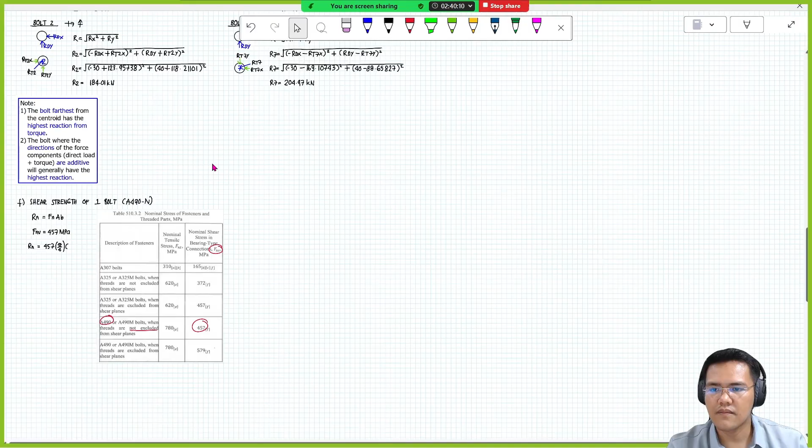So we could say na R sub n is equal to F sub n, which is 457 MPa, times area ng isang bolt, which is pi over 4. Ano ba yung diameter natin dito na pinagamit sa problem? Yung diameter natin is 22 mm. Solve natin yon, 22 squared, divide by 1,000 para maging kilonewton.

Gusto ko lang i-emphasize ulit, yung given problem natin is single shear, hindi naman double shear. I-emphasize natin dito. At since strength lang siya ng single bolt, wala na tayong kailangan i-multiply dito na total number of bolts.

So we already have the R sub n. Ilan tong R sub n? 173.72065 kilonewton.

Now, LRFD tayo, meaning we need R sub u. R sub u is equal to phi times R sub n. Yung phi for shear, alam niyo na to, it's 0.75, times R sub n. So meron na tayong actual shear strength ng isang bolt against shear failure.

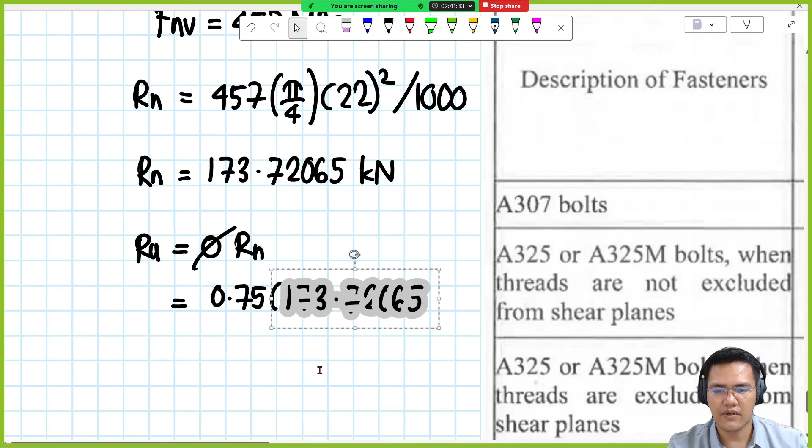Ilan to? 130, 2 decimal na lang, point 29 kilonewton.

Ngayon, ang question for next item, yung last item natin is ano daw yung DCR? In terms of DCR or adequacy, that is simply, yung kung ano man yung due to load or yung reaction, i-divide mo lang doon sa strength or the available strength or yung capacity.

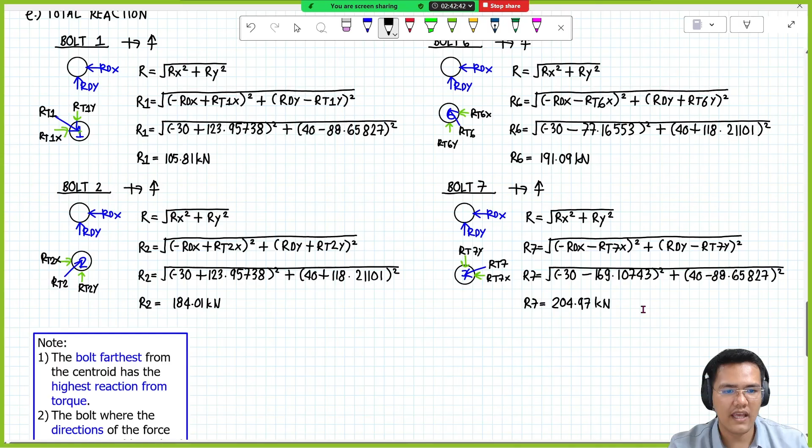Capacity na lang siguro. So basically, kung ano yung sa load, yung numerator, kung ano yung most stress bolt, yung bolt 7, ito yung nag-govern na reaction, tapos i-divide lang natin by the actual capacity against shear ng isang bolt, which is 130.29.

Then magkakaroon tayo ng DCR. Ilan tong DCR natin dito? 1.57. Sorry, pakiulit? 1.57. Okay, 1.57.

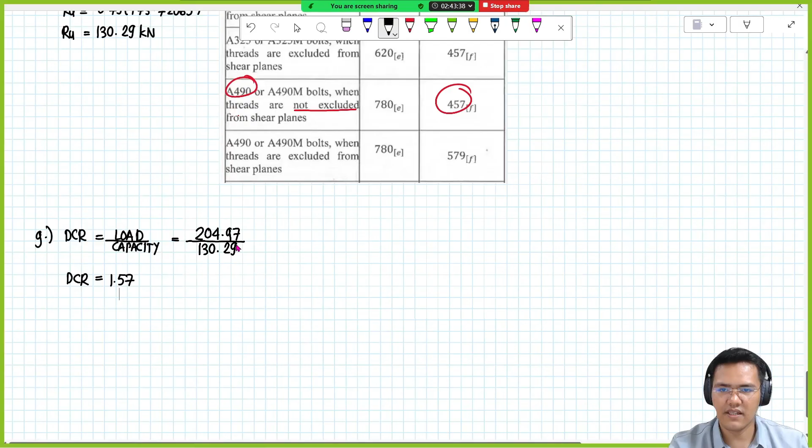So as simple as that. Tapos na yung problem natin. Any question or clarification? Meron bang malabo sa ating calculations? Highlight lang natin yung mga nag-govern, ito yung most stress bolt. Sige, no questions? Tama ba?